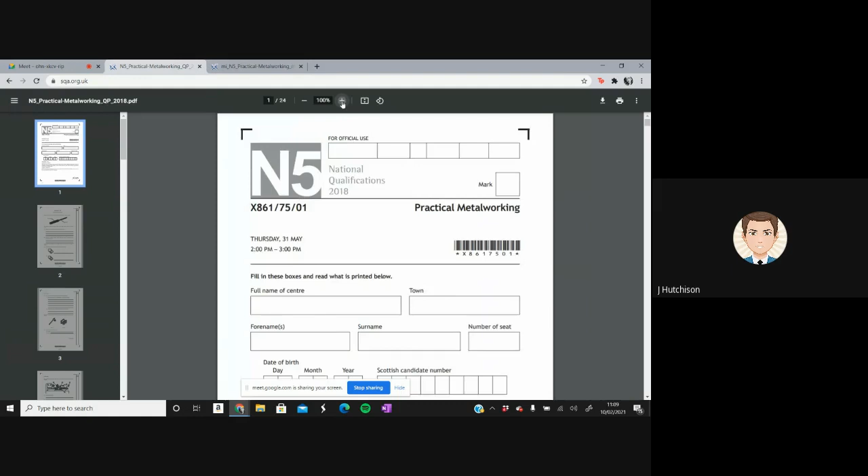So today what we're going to do is we're going to take a wee look through the 2018 National 5 Practical Metalworking paper as well as the marking instructions. So, there we go, close that. Hopefully we can see we've got the past paper on the screen as well as the marking instructions right there. So, as we can see, it's a 1 hour long paper and it is worth 60 marks.

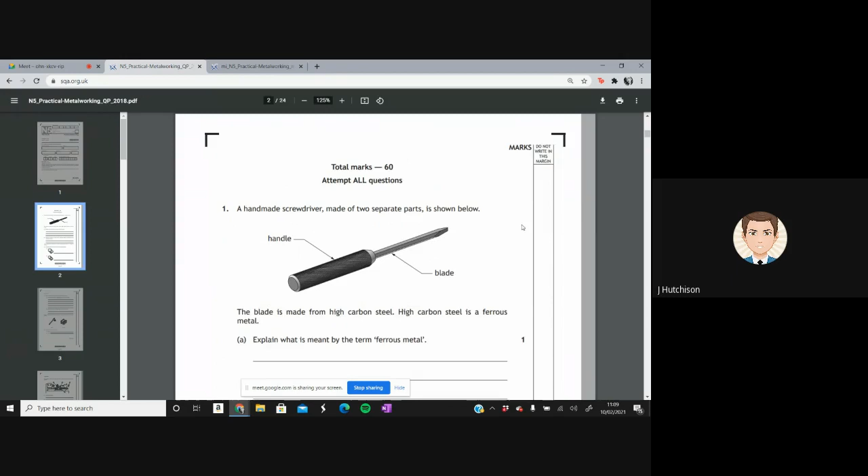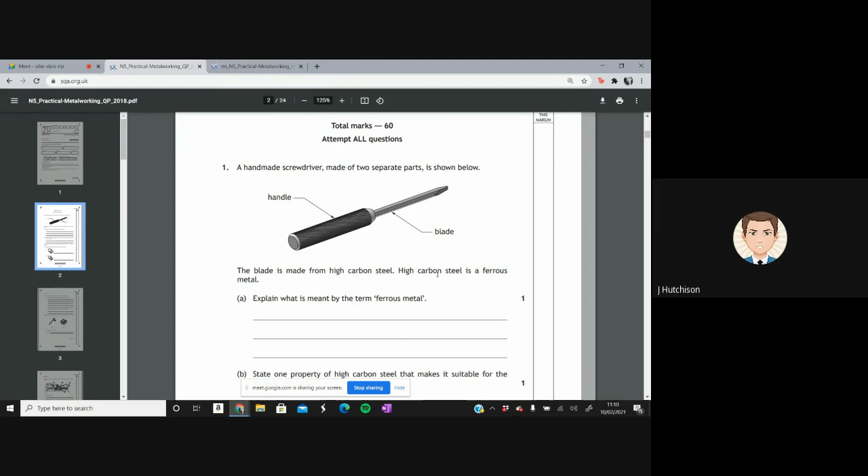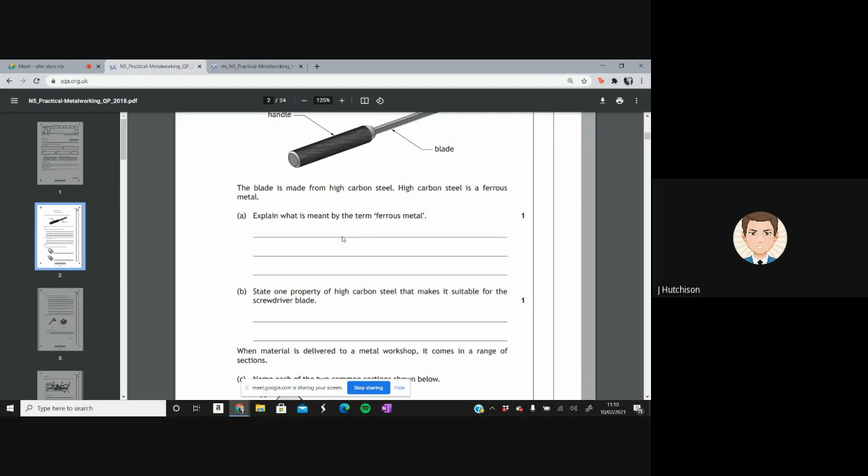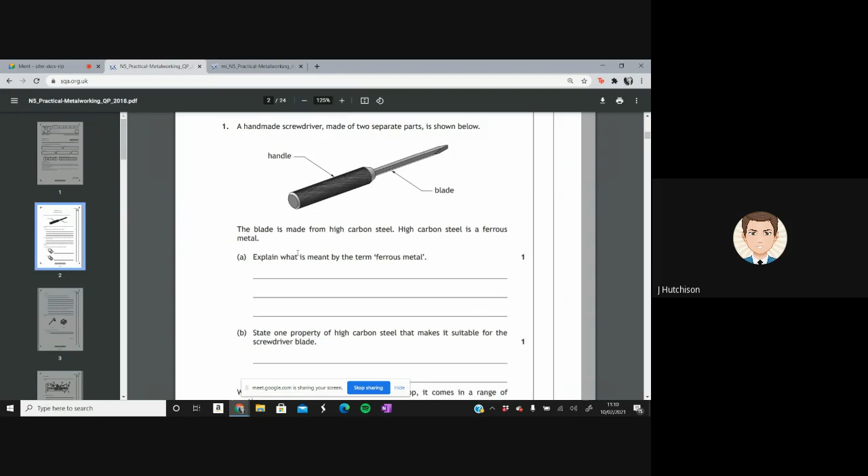So, going into question 1 here, a handmade screwdriver made of 2 separate parts is shown below. So we've got the handle and we have the blade. The blade is made from high carbon steel. High carbon steel is a ferrous metal. Explain what is meant by the term ferrous metal. So this is only worth 1 mark here, and the answer that they should be looking for is that ferrous metals contain iron. So if we look at the marking instructions 1A, ferrous metals contain iron, 1 mark. All good.

Another 1 mark question here, state one property of high carbon steel that makes it suitable for the screwdriver blade. So all of our different types of material, I would be learning at least 1 property, definitely a couple more, but at least know 1 property of every type of material. So for high carbon steel, things that come to my mind is that it's tough, it's hard, it's also strong.

So if we have a look, accept any one of the following. So we've got tough, hard wearing, durable, impact resistant, hard, can be hardened, can be tempered, strong, and any property that relates directly to screwdriver use. Do not accept brittle and do not accept inferior resistance to corrosion. So these are the answers that we will not accept, and you've got a large list of answers we do accept just for 1 mark.

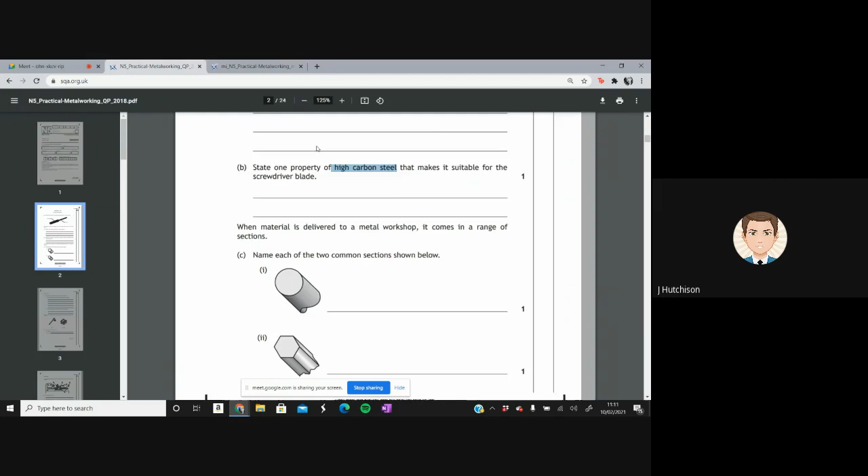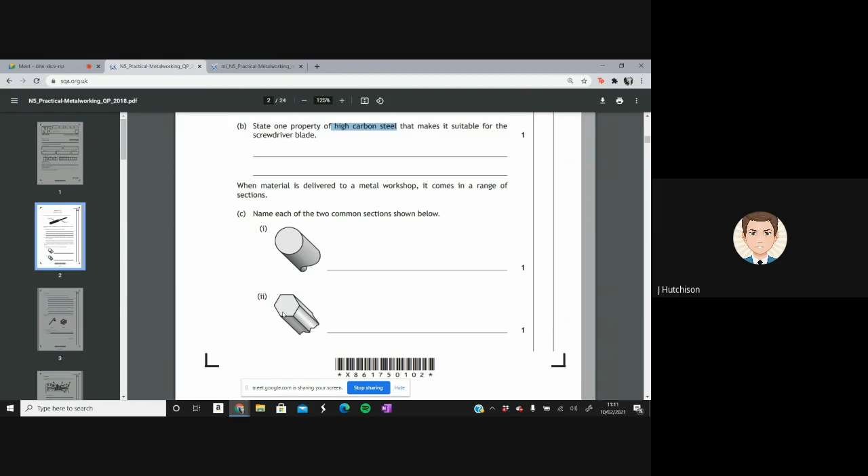Question 1C, name each of the 2 common sections shown below. Now, this is a nice easy question, 1 mark for each. All it's asking is what shape is this bar? So for I, what I would say is it's a round bar, it's just a cylinder. And for II I would put hexagonal bar because we've got a hexagon on the front there. So there, round bar and hexagon bar. For hexagon bar, it would accept any reference to hexagonal bar, for example, a hex bar or a hexagon bar.

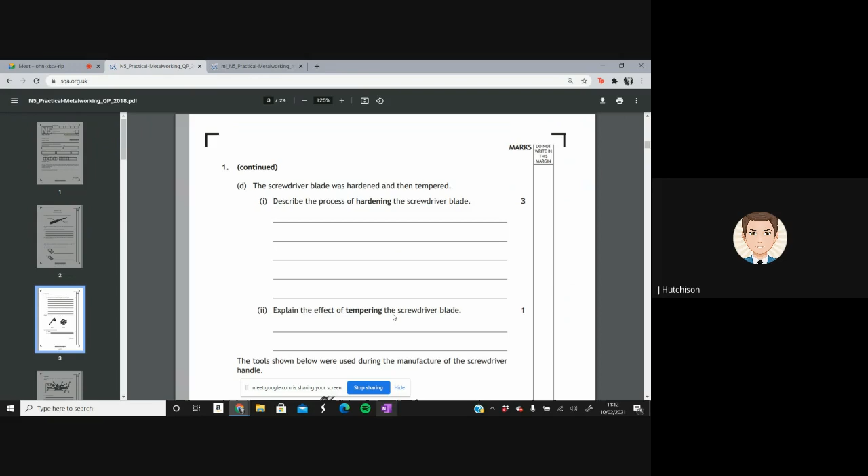Moving on to 1D, onto the second page now. The screwdriver blade was hardened and then tempered. Describe the process of hardening the screwdriver blade. So this is a 3 mark question here. To harden, you need to heat the metal up first. You need to heat the metal to a cherry red color, and then you need to cool the metal rapidly.

So let's go on. Heat the screwdriver blade is worth 1 mark. And then stating how hot you need to get it. So a hot cherry red color is what color your metal should be, and that's 1 mark. And then cooling rapidly is also 1 mark. Candidates may specify cool in water or oil, quench in water or oil. This is acceptable. As you're putting a hot piece of bar into either water or oil, it's called quenching the bar. But at the same time, quenching it is also cooling the bar. So they would accept either.

Moving on to II now, we've got explain the effects of tempering the screwdriver. So what tempering does is that it reduces brittleness and it also reduces hardness, but all they're asking for is 1 mark out of that. So either one of those 2.

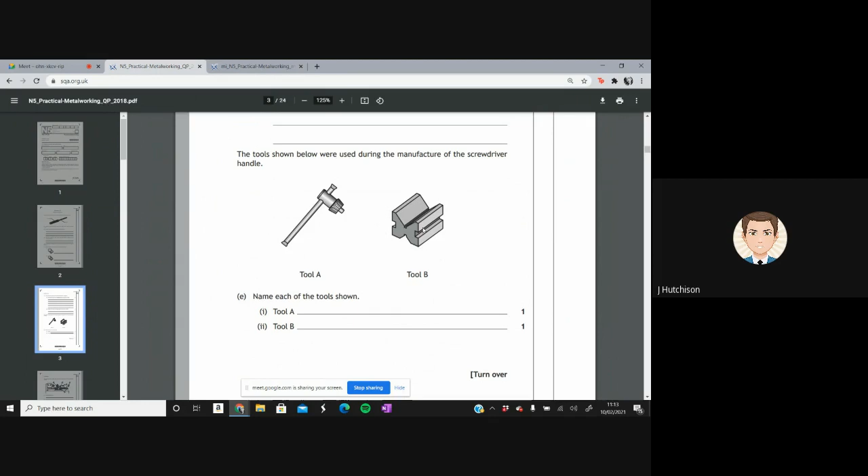The tools shown below were used during the manufacture of the screwdriver handle. So we have got tool A here and we've got tool B here. What we have for tool A is a Jacob's chuck key, and for tool B we have a V block right there. So if we go in here, yep, I is a Jacob's chuck key and II is a V block. 1 mark for each. For I, they would also just accept chuck key. So you don't need to include Jacob's, but that is what it is. It's a Jacob's chuck key, but we just say chuck key for short.

Moving on to F here. The machine shown below was used in the manufacture of the screwdriver handle. So F, name this machine. Nice and easy. This is the center lathe. We should have all had a wee shot of it.

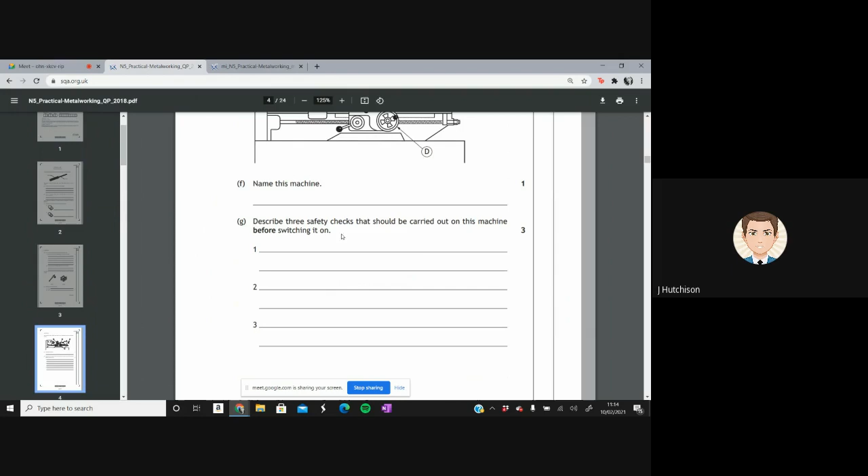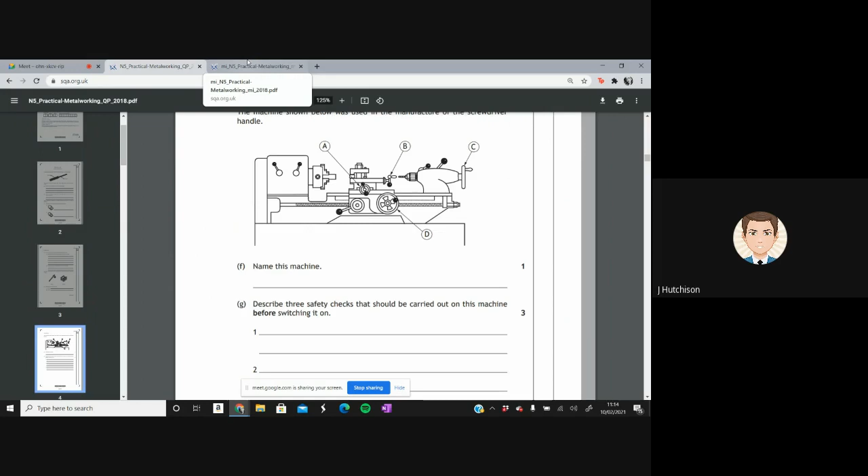Describe 3 safety checks that should be carried out on this machine before switching it on. So if you remember, most of the machines use generally the same health and safety rules or safety checks. The lathe has a couple specific ones just for it. I guess we would need to make sure that the guard is down. That's specific for the lathe. Obviously, there are guards on pillar drills, but you don't need to use them all the time.

So if we go in here and we have a wee look, we'll need to skip onto this page now. What they want is any 3 of the following answers. So obviously the guard must be placed in position. The difference for the center lathe is it must be positioned at all times. They have this in brackets though, so as long as you put the guard must be placed in position, that's fine. The material to be machined must be placed in the chuck securely. So that's securing your material.

Chuck key must not be left in the chuck. Obviously, you wouldn't want that to happen. You wouldn't want a chuck key pinging halfway across the classroom. Check emergency stop, foot or knee switches, and make sure they're working. So always try, turn on the machine, make sure your emergency stops are working. Ensure feed mechanisms are not engaged before starting the tool. So obviously make sure everything's turned off. Make sure the tool's at the correct angle.

Machine should be set at the correct speed, so obviously we can change the different gears to make it move at different speeds. Cutting tool is secure in the post, so we've got our material as well as our cutting tool secure. Drill bit obviously secure as well, and any reference to checking parts of the machine for damage or missing parts. So always do a quick check over on your machine to make sure everything's in working order before you turn it on.

Cool. Moving on to 1H now. So we have handles A, B, C, and D shown on the machine opposite, used during the manufacture of the screwdriver. Identify the correct handle to use when carrying out the process shown below. So we've got our different tools right here, and we want our different handles. Now, the handles it's referring to are back on this page right here. So we have A pointing to this handle here, B pointing to this handle, C to this one, and then D to this handle right here.

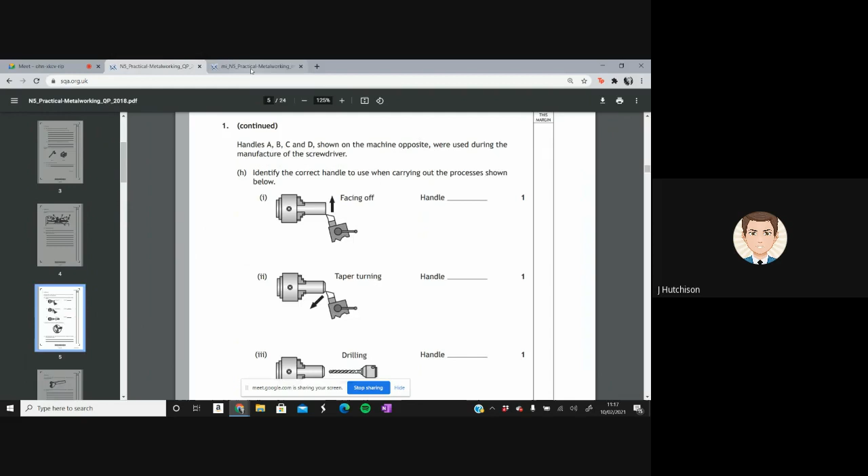So for facing off, we would use handle A. So handle A, this handle here, uses the compound slide, and we can use that for taper turning as well as facing off. So if we go in here, for I, we have handle A. For II, we have handle B. And for the next one, we have handle C. So handle A would be used to face off, handle B would be used for taper turning, and handle C would be used for drilling.

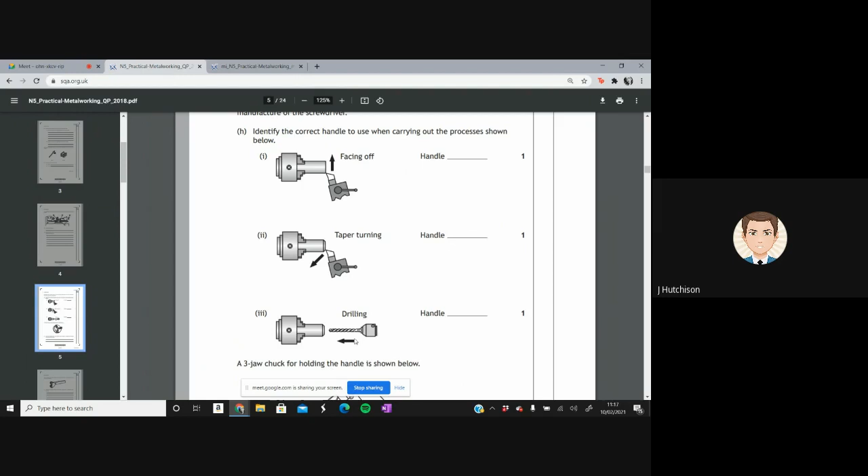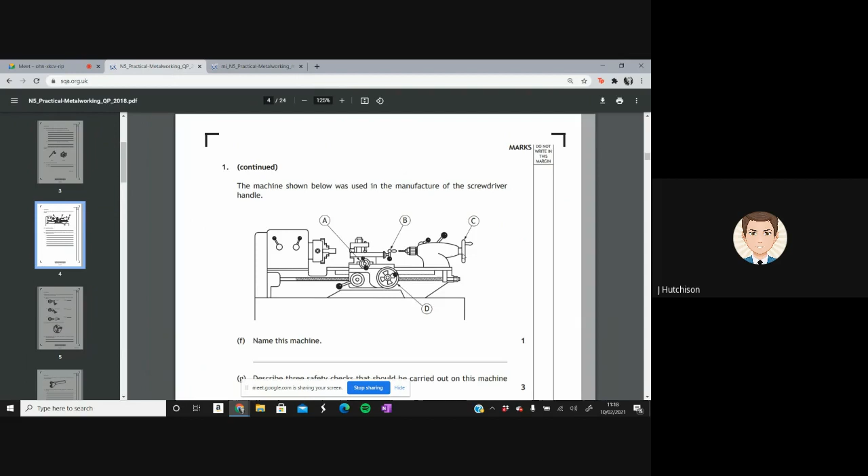So handle A right there, that would be used for facing off. This one up here, I'm pretty sure I said handle A was the compound slide. That's my bad. That's that one there, handle B. And handle C right here at the end of the tailstock would move this drill in for drilling.

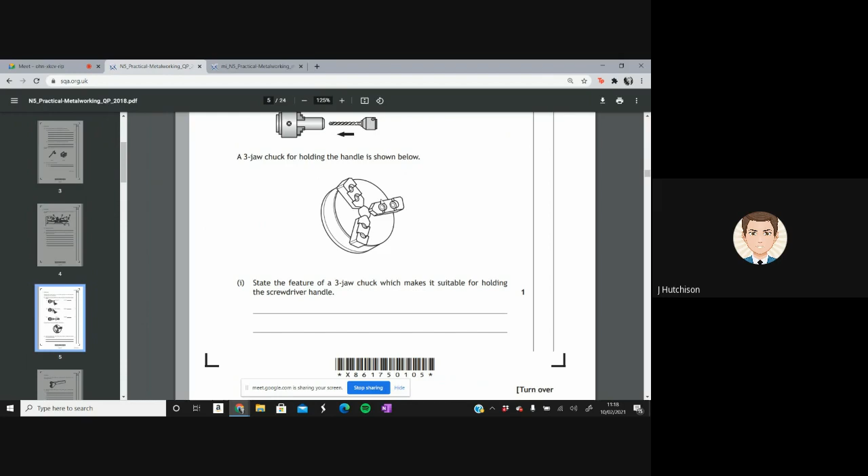Now, a 3-jaw chuck for holding the handle is shown below. So state the feature of a 3-jaw chuck which makes it suitable for holding the screwdriver handle. The thing they're wanting you to reference is that all of the chuck's jaws, these 3 jaws, move at the same time, and they can perfectly hold a cylinder for turning. So if we have a wee look at the answer, all 3 jaws move at the same time, and another one you could have is that the 3-jaw chuck is self-centering, so it will make sure that your material is nice and centered.

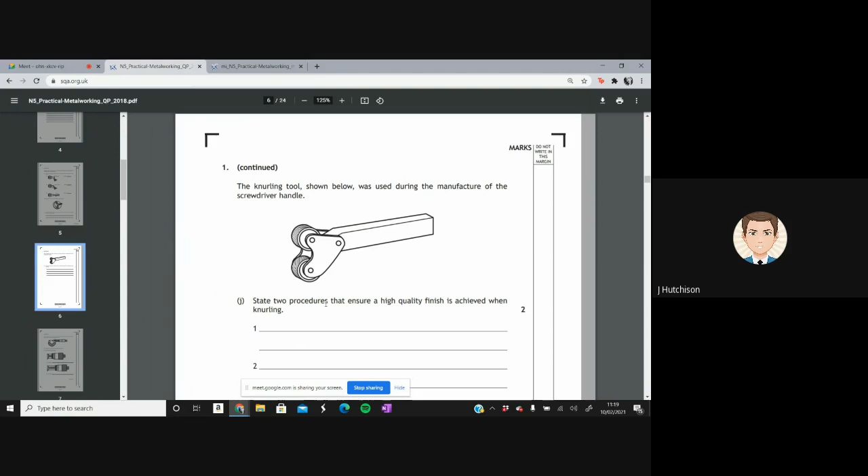1J, I think this is the last one out of question 1. The knurling tool shown below was used during the manufacture of the screwdriver, so that's going to be for the nice textured handle. State 2 procedures that ensure a high quality finish is achieved when knurling. So one thing I always like to remember when we're knurling, we always need to change the speed of the machine. We need to make it a bit slower. So for my first answer, I always put change the speed of the machine, because if you keep the speed up high, it's not going to leave a good quality finish with the knurling tool. So we always want it nice and slow. So that can always be 1 mark.

Another couple answers that we can have for this, because keep in mind it's a 2 mark question. So set the center lathe to a slow turning speed. That's our first mark. Always remember that. We could use coolant on the knurling tool. We could adjust the pressure of the knurling tool, so how hard we're pushing it into our work, how deep the cuts are going to be. Tool must be at the right angle to the workpiece. So obviously we want to make sure that it's sitting nice and flat against the workpiece.

Always clean the knurling tool after use. Always check if your tool is sharp enough before you're about to use it. And we could also set a pivot pin of knurling tool to the center height.

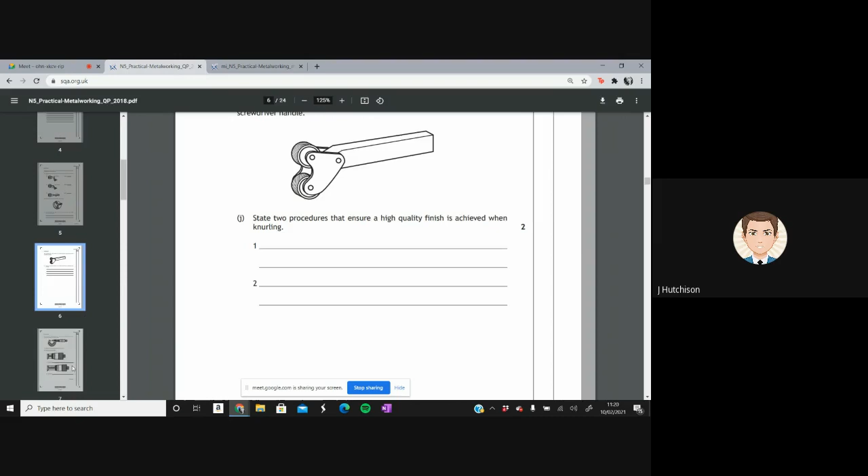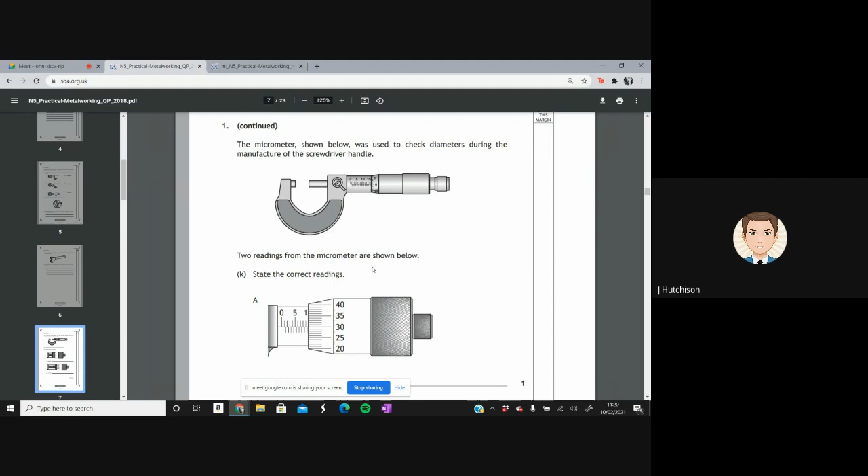Now, moving on, we have a micrometer question. Oh, we're still on question 1. The micrometer shown below was used to check diameters during the manufacture of the screwdriver handle. 2 readings from the micrometer are shown below. State the correct readings. So all we've got here is we've got 2 readings of our micrometers, and we want to try and find out what they are.

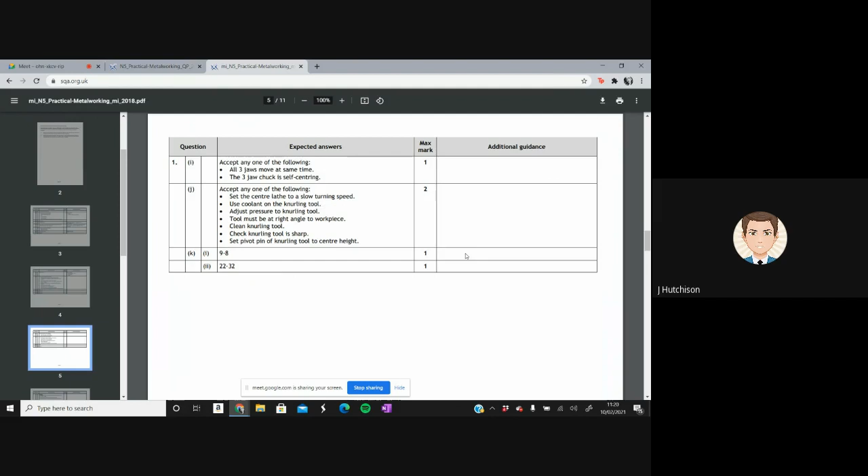So the answers for those ones, 9.8 and 22.32. Now, as you can see, additional guidance, there isn't any, so they want you to get these exact answers. Usually there would be a bit of a tolerance, but right here, since it's just a nice clear picture of the micrometer, they want you to give the exact measurement. So we have 9.8 for I, and we have 22.32 for II.

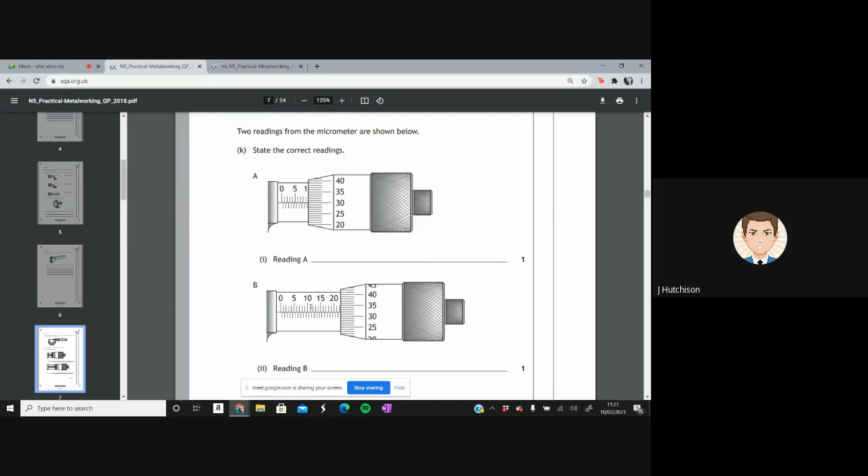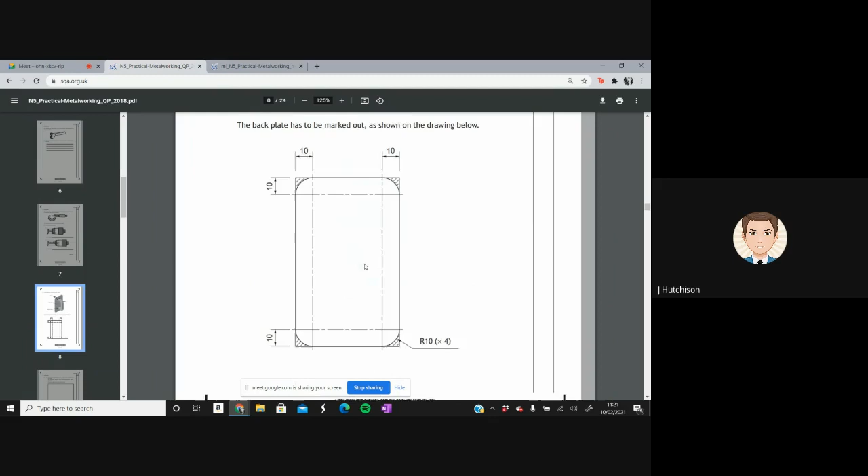A(i), describe how to accurately mark the radius 10 on the corners of the backplate. You must make reference to all tools, processes, and relevant dimensions. You may use sketches to support your answer. Now, like I always say, you may use sketches to support your answer. Just use a sketch. This isn't art. This isn't graphics. We're not requiring you to be good at drawing at all.

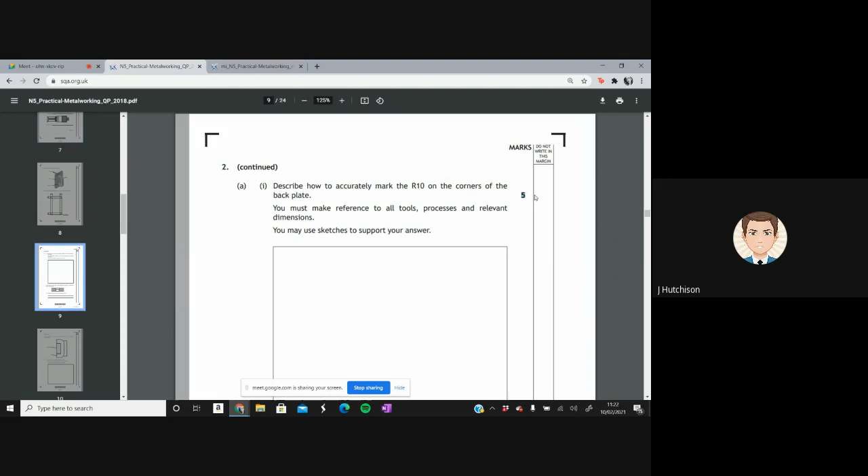All that sketching does is it helps the marker see what you mean, because you could be describing all of this with words and it might not make any sense. But if you draw a small sketch and then draw an arrow pointing to that sketch, it could help the marker piece it together. So 5 marks for this question. Now there's a couple different approaches. This is the type of question that you might get multiple different answers to. So we'll go and take a look at a couple of the answers. See 5 marks, and we've got 2 methods right here.

So first method, you would get a mark for setting odd leg calipers. You would then get a mark for marking center lines, 10 millimeters from each edge. Then center punch where the lines intersect. Obviously you want to do this at each corner, so they've put ×4. Remember, we don't need to write out full paragraphs. We can just write these out in bullet points. It's just wanting a step-by-step on how you would mark out the shape. So that's 1 mark there.

And then set spring dividers, another mark, and to 10 millimeters and mark radii. So usually I would probably have this as 1 sentence, but that's just me. I would say set the spring dividers to 10 millimeters and mark the radius. But you can see if you say set the spring dividers, that's worth 1 mark, and to 10 millimeters and mark the radius is also another mark there. So I would probably only have about 4 points for that, but I would still be getting the full marks for setting the spring dividers and to 10 millimeters.

Method 2, we want to use a steel rule and measure 10 millimeters from each edge. Use an engineer square to scribe and mark the lines. Again, center punch our 4 corners. Make sure to say either ×4 or your 4 corners. Set the spring dividers, and again, that's our last mark there. Set the spring dividers, 1 mark, to 10mm, and mark the radii as 1 mark as well.

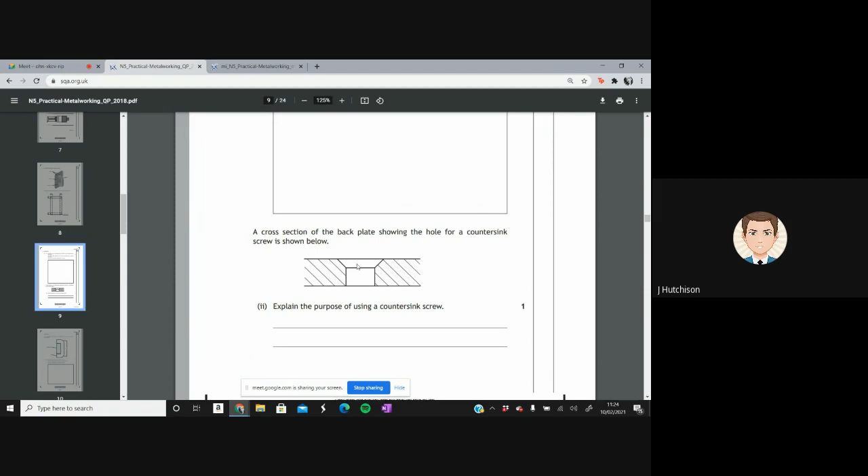So the main point is, so the screw sits nice and flat and level with the surface of the material, so the screw doesn't stick up a wee bit. So if we look here, to allow the head of the countersunk screw to sit flush with or below the surface of the backplate / material. So that's 1 mark there.

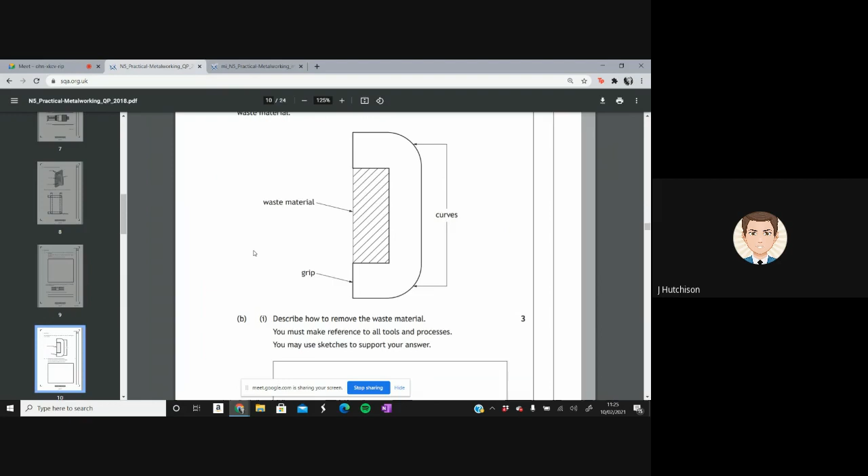Moving on. So we've had a marking out question. Now it seems as if we're coming to a cutting out question. So this drawing shows how the grip was marked out prior to removing the waste material. So that's the grip, that's the handle, and we've got our waste material right there. Describe how to remove the waste material. You must make reference to all tools and processes. You may use sketches to support your answer.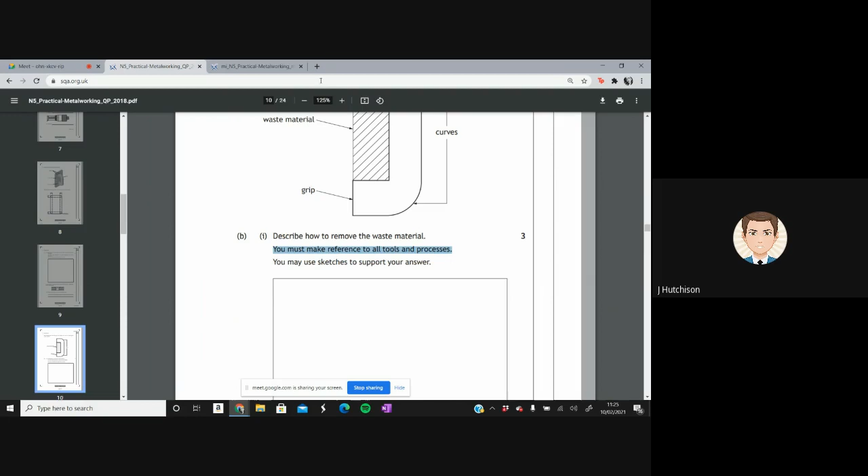So obviously one thing I forgot to highlight on the last one, you must make reference to all tools and processes. If you just say you're doing things and you don't explain what you're using for them, you don't get any marks for that. So always make sure you use the right names and the right tools. So going on here, again, we'll have 2 different methods. Only a 3 mark question this time.

Any reference to drilling holes to accommodate blades, using the hacksaw, junior hacksaw, to cut or remove waste material, or filing lines to the correct size. We could also use a chain drilling method. So chain drill along waste material, remove waste material with a cold chisel or a combination of hacksaw and cold chisel, and then lastly, again, file to the lines. So obviously, once we cut everything out, we want to file it and make sure it's all nice and even.

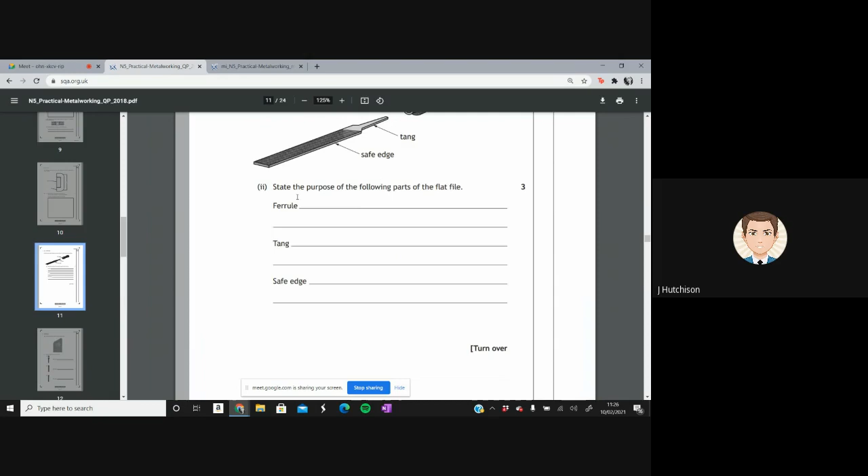Looking here, a flat file was used to shape the curves. Parts of the flat file are shown below. So it's given us the name of the ferrule, the tang, as well as the safe edge. So we're not wanting to name these. Instead what we're wanting to do is we're wanting to state the purpose of each of these parts.

So we have the ferrule. Prevents the handle of the wood splitting. So the ferrule wraps around this wooden handle right there. That's a piece of metal. Tang goes inside, and this ferrule will stop this wood from splitting. It holds it in place so that the handle can sit nice in there.

Then we have the tang. The tang is to locate and attach the file handle. So that's this stretch of material right here, and that's what sits inside the wooden handle. So this will run along the wooden handle so that a fair bit of material is actually connected inside that handle there. And lastly, we have the safe edge.

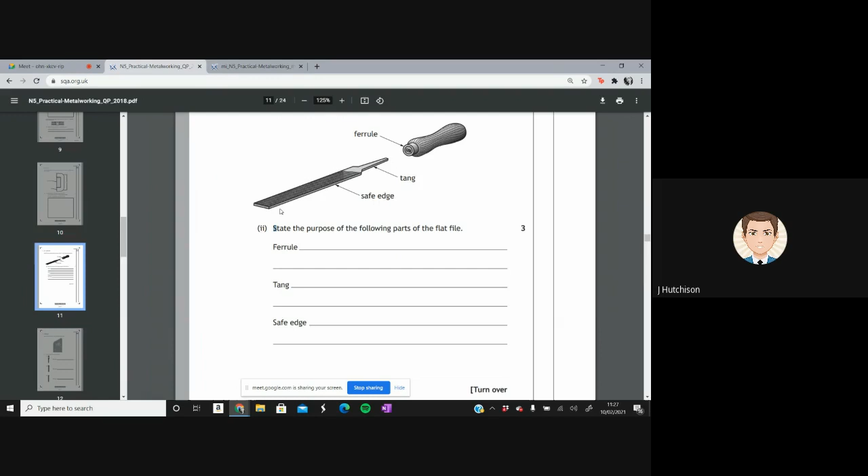That's just to make sure that no cutting is going on in that edge, so you don't go over. So prevent material from being cut during filing operations and protects thumbs, fingers during filing operations. So it's like a safety edge, and also so that you don't cut material you don't want to. So explaining each of those gives you 1 mark each.

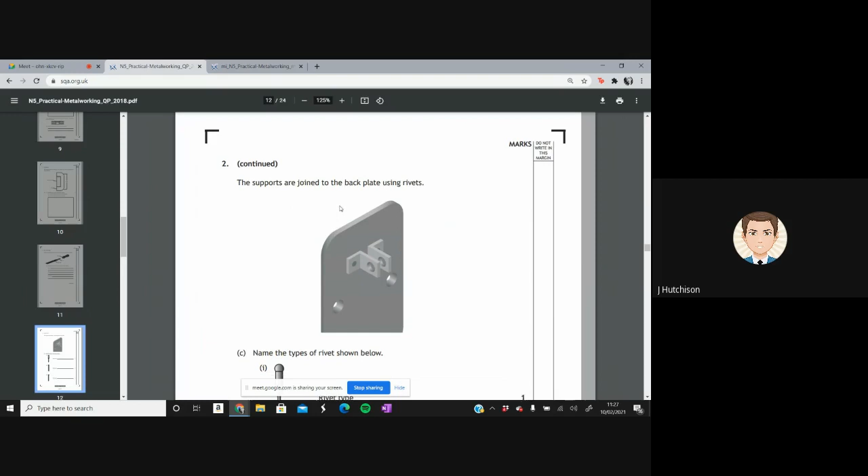On to 2C. So this is just naming the types of rivets we have right here. So what we've got right there, we have a pop rivet. You can remember that for the ball on the top. We have a snap head rivet, and we also have a countersink rivet. Remember the countersink because it's got this angled slope here. So let's go in, let's double check that we're right. Pop rivet, snap head rivet, countersink rivet. Perfect.

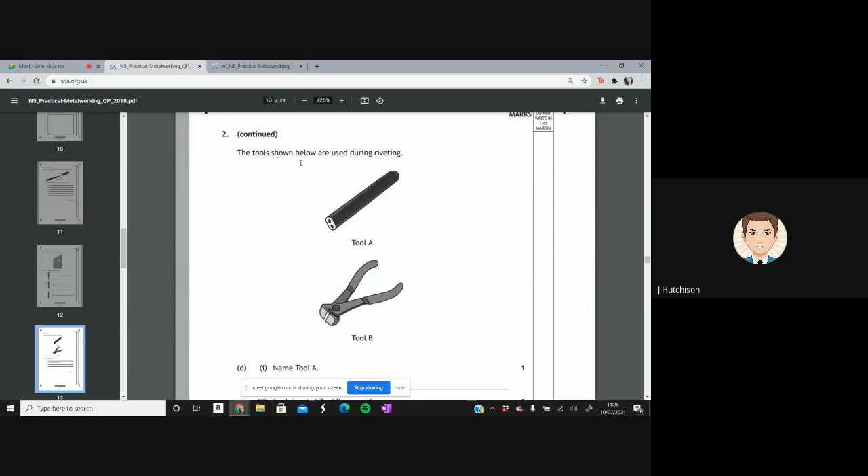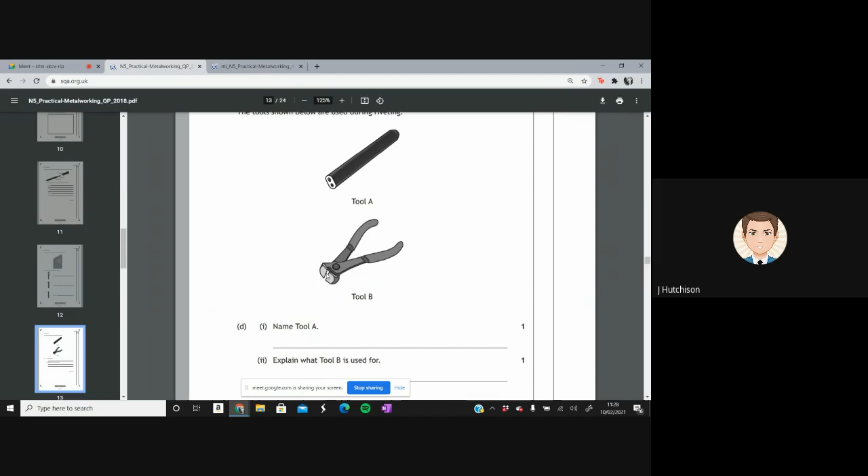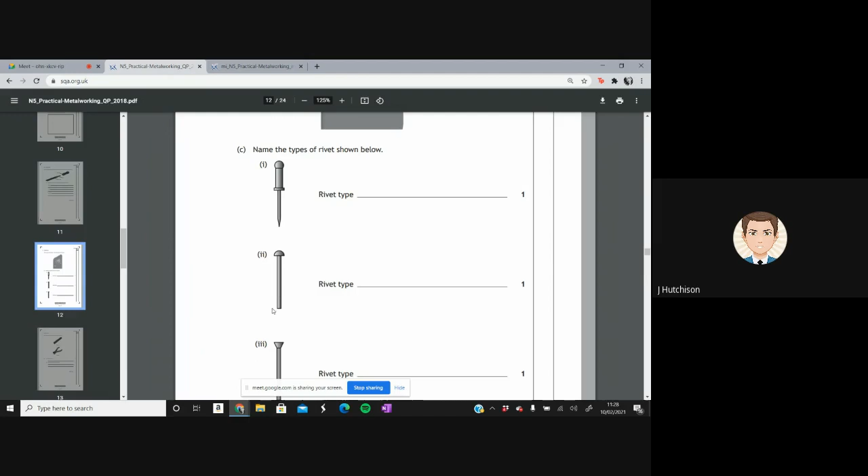Question 2D, the tools shown below are used during riveting. So we have tool A and we have tool B. So tool A would be a rivet snap set. We'll go in and check. Rivet snap set, perfect. 1 mark for that. And it's not asking us the name for tool B, it's asking us to explain what tool B is used for. And these are small pincers to cut rivets to the right length. So to trim the end of rivets to the required length. So if we have a rivet, it's a wee bit too long, just trim it off.

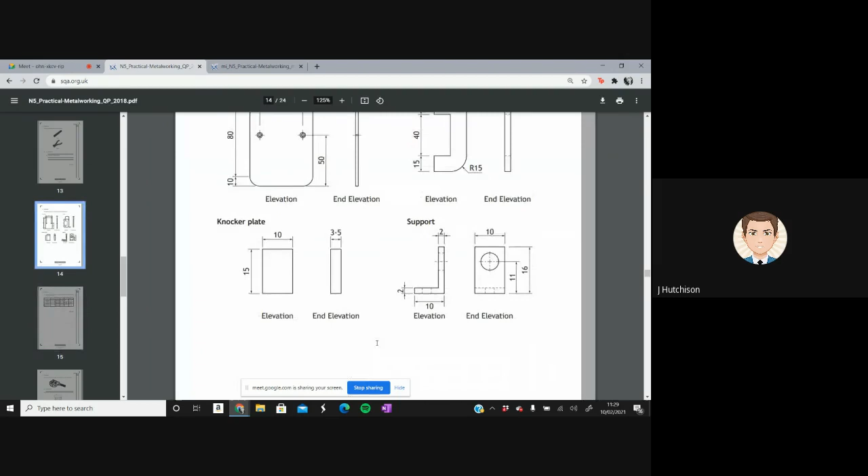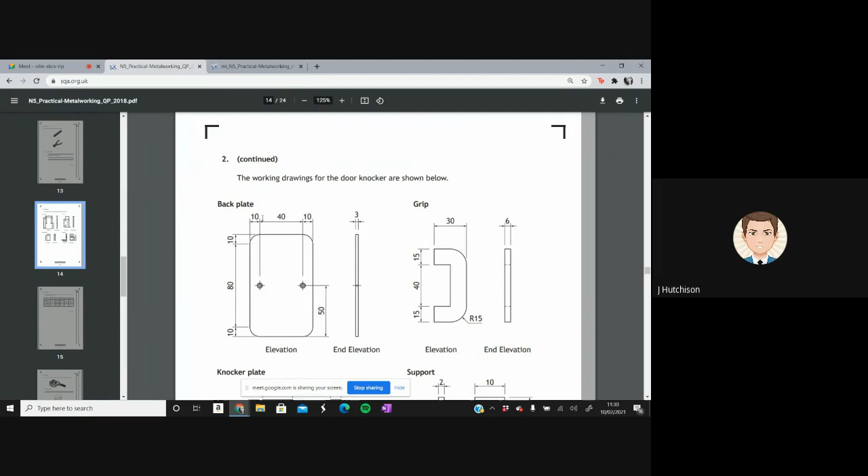So if we go up here, what we want to do is we want to have a look at backplate right there. And what we're trying to find out, we know the length is 100 and the thickness is 3. So there's 10 plus 80, that's 90, plus 10 is 100, so that's the length. The thickness of the material over here is 3. And what we want to find out is the width. So this area here, and what I can see is I've got 10 millimeters, plus 40 is 50, plus 10 is 60. So for this breadth here of the backplate, that would be 60.

For the grip, number 1, mild steel. Length, we don't know. Breadth is 30 and thickness is 6. So come up here to the grip. Width is 30, thickness is 6. We want the length of it, so we'll add 15, add 40, so that's 55, and then 55 plus 15 is 70.

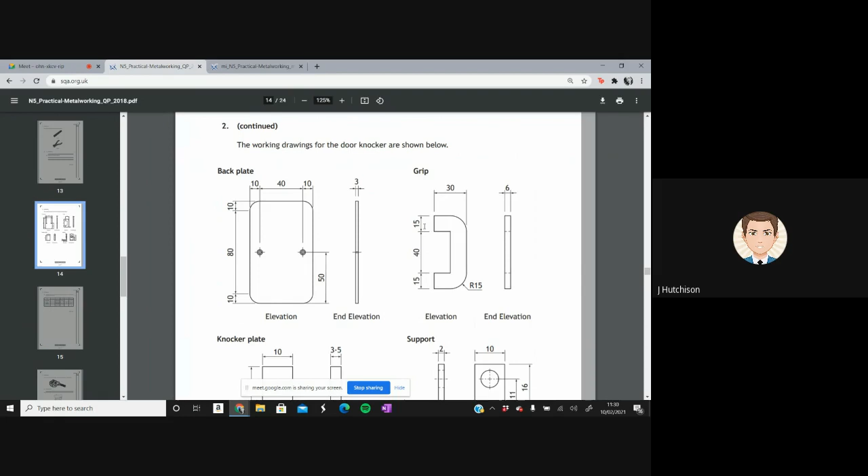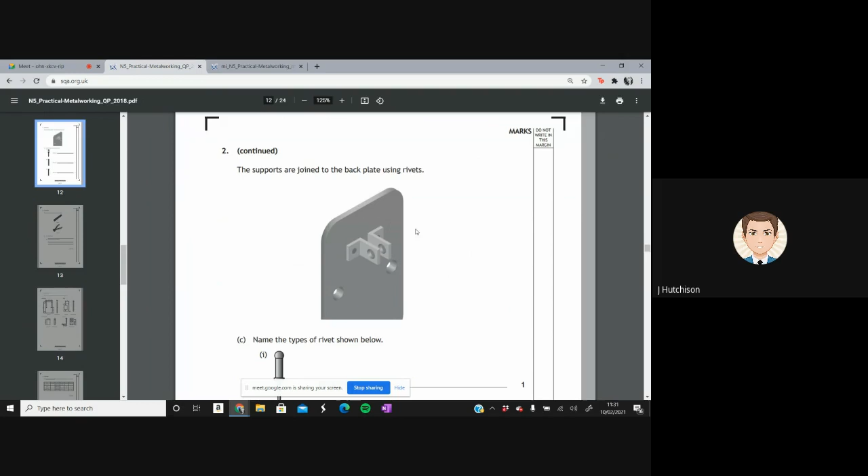Nope, that is some bad maths by me. 55 plus 15 is actually 70. So in that one, we would have a length of 70 for the grip. For the support, we have everything apart from the number it has. So as you can see here, it's only showing us 1 support. But if we go up, I believe it was here to this one, because it's still all the same question. This is still on question 2. You can see we require 2 supports in that image there. So what I would go is I would go down here and I would write 2 supports are needed.

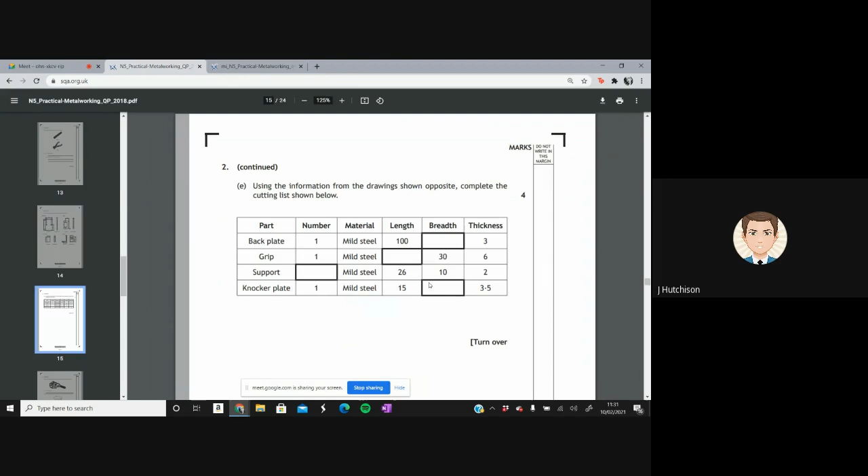For the last one, the knocker plate, number 1, mild steel, length 15, breadth we don't know, and thickness is 3.5. So this is the knocker plate. Length is 15, and width, nice and easy. Already got it there. It's 10. So let's go on and check. Yep. So we've got 60 breadth for the backplate, 70 for the grip, 2 supports, and 10 is the breadth of the knocker plate.

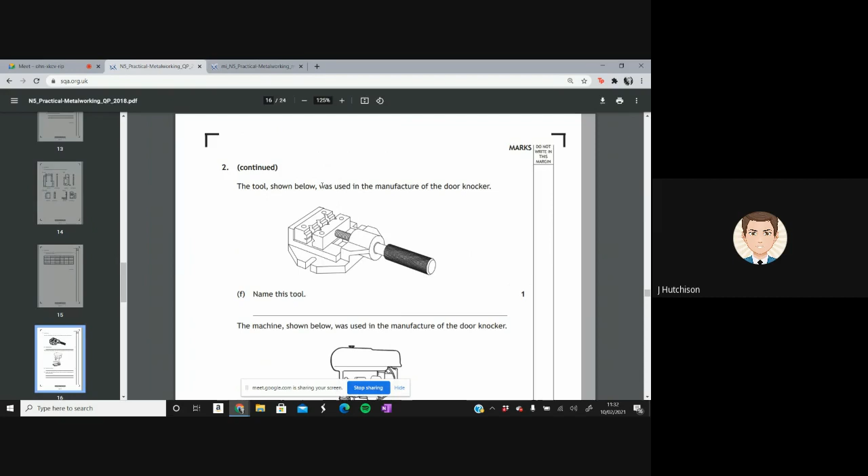Moving on, a couple of name the tools or machines. So the tool shown below was used in the manufacture of the door knocker. Name this tool. Nice and easy, that's a machine vise. And the machine shown below was used in the manufacture of the door knocker. Name this machine. So I believe for this one, they would accept pillar or pedestal. So we'll have a check. Yep, so machine vise was the answer for the last one. And for G, they would accept pedestal or pillar drill. So either one of those 2 for that.

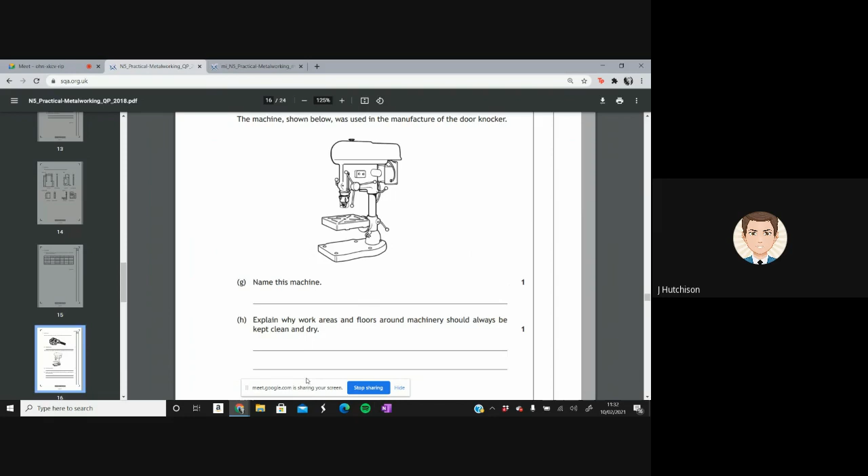Explain why work areas and floors around machinery should always be kept clean and dry. This is nice, easy, health and safety basics. We've got tons of different answers for it. Prevent accidents, injuries, prevent slips and falls, and to access the emergency foot stop. So always make sure that your work area is kept clear.

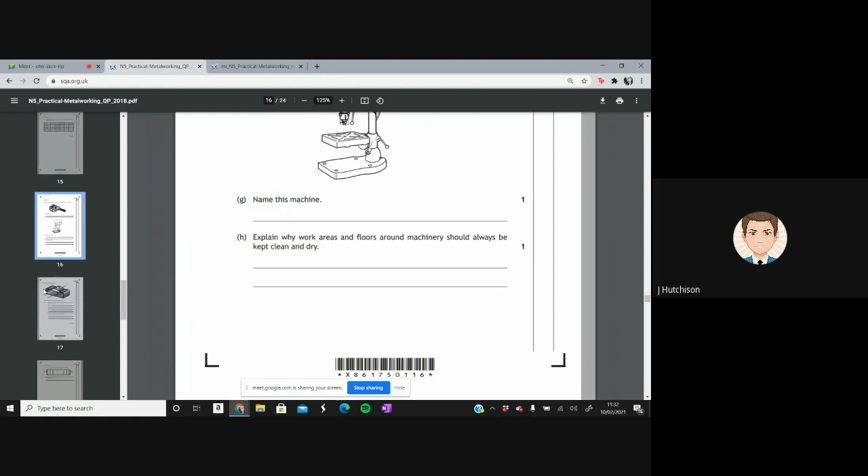Moving on again to question 3 now. So a candle holder is shown below. We have the top of the candle holder and we have the body. The candle holder was made from recycled metal. State why it is important to use recycled metal whenever possible. Give 2 reasons. So the reasons that they're wanting you to mainly look at for this is the recycled metals can be used for upcycling, saves finite resources, stops metal ore running out. Obviously, we have a limited amount of resources. The more recycling we can do, the better.

Less damage to the environment by mining. Obviously, mines take up a large portion of underground work. So the less we do that, the better. And landfill sites are not filled up as quickly, so fewer landfills needed. So less junk lying about. 1 mark for each unique point. So if you were to give 2 points about mining, you would only get 1 mark for that. If the answer is a general comment regarding the environment, only 1 mark can be awarded. So even if you're unsure about this question, if you say it helps the environment, it's a general comment regarding the environment, so you would still get 1 mark, but obviously we want to aim to try and remember these 4 here. They're our main ones. So 2 of those to get the answer.

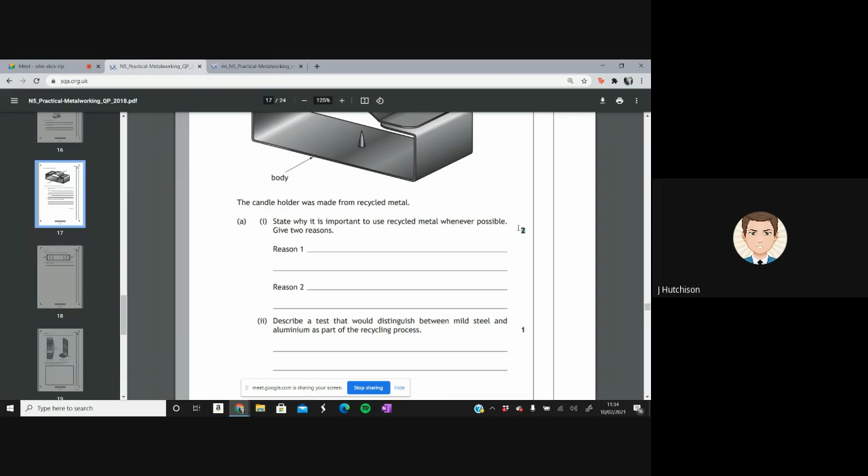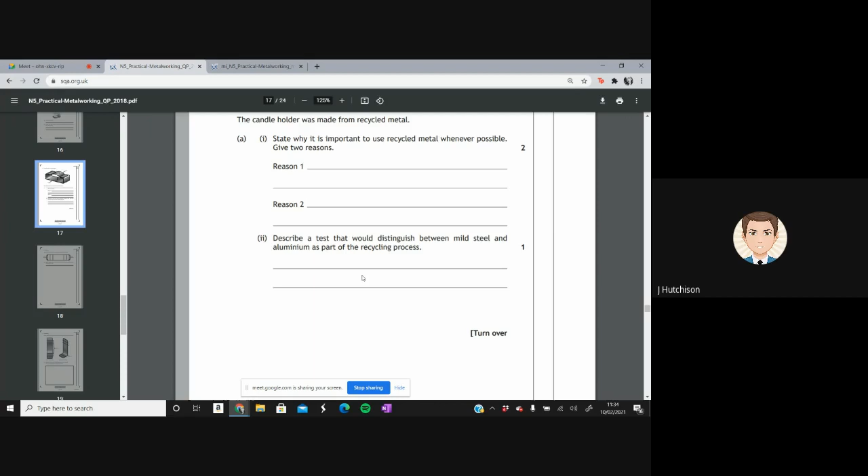Describe the test that would distinguish between mild steel and aluminium as part of the recycling process. So we would want to obviously test which one is magnetic or not. So that's a way that you could tell which one. Obviously, if you wanted to split them all up, just hold a large magnet above it, and one of them will separate from the other. Now, test which metal is magnetic.

Now we're on to question B. The body shown below was made from 1mm mild steel sheet. So we've got our waste material at the corner, and we have our waste material there, and we've got a couple of bend lines. So that's this shape on top here. Name a hand tool that can be used to remove the waste material before finishing with a file. So we have a small bit of material here. We could use a tool before we go to filing. Now, there's a lot of different tools that we could use for this, a couple different answers, and all they want is one of the following. So either tin snips to cut it off, a hacksaw, or a junior hacksaw. So any of the 3 following to cut that bit off, that small waste material.

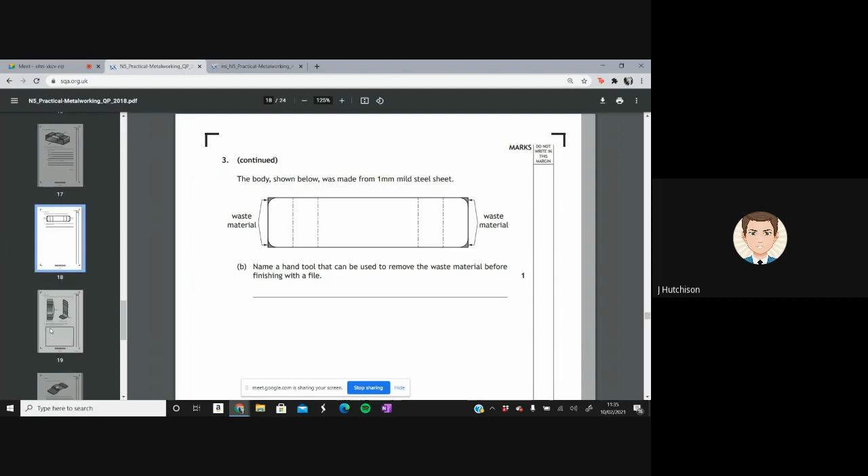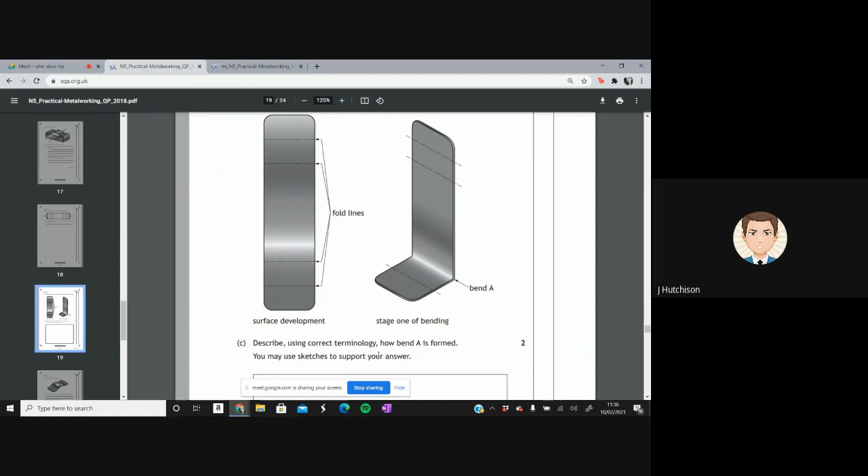Question 3 continued. The surface development and stage of bending the body are shown below. So we have our fold lines, and we're starting to bend this now. Describe using correct terminology how bend A is formed. You may use sketches to support your answer. So another one here, only a 2 mark one this time.

What they're wanting is you're wanting to align the fold lines with an engineer's vise, folding bar, jig, straight edge, box folder. So there's a lot of different methods that we can use to fold metal. So I'm going to go ahead and talk about a box folder for now. So what I would say is align the fold line in the box folder. That would be worth 1 mark. Form bend A with the box folder. And that's our 2 marks there.

Same with if I wanted to use an engineer's vise, I would say align the fold line in the engineer's vise. That's 1 mark. Form bend A with a rubber mallet. So if I had it in the vise, I would be hammering it with a rubber mallet, obviously rubber, to make sure there's no dents in my material. And that's how I would form it that way. So as long as you're saying that you're aligning the lines with whatever method you're using, and then you're forming it using your method, that's worth 2 marks.

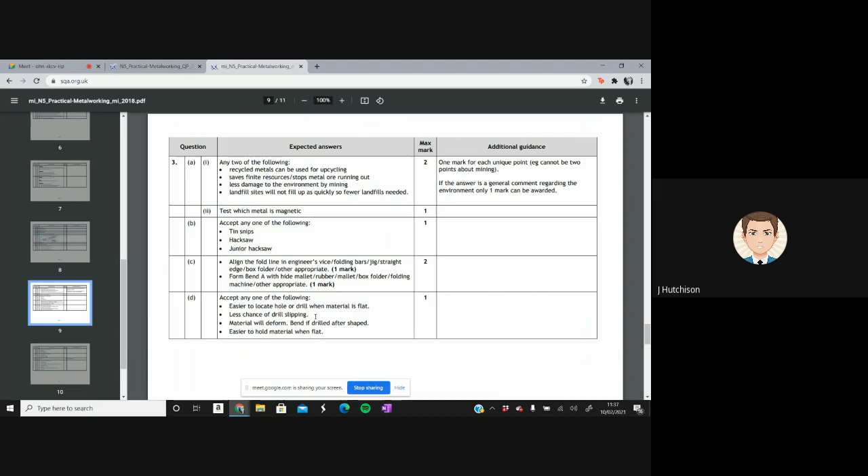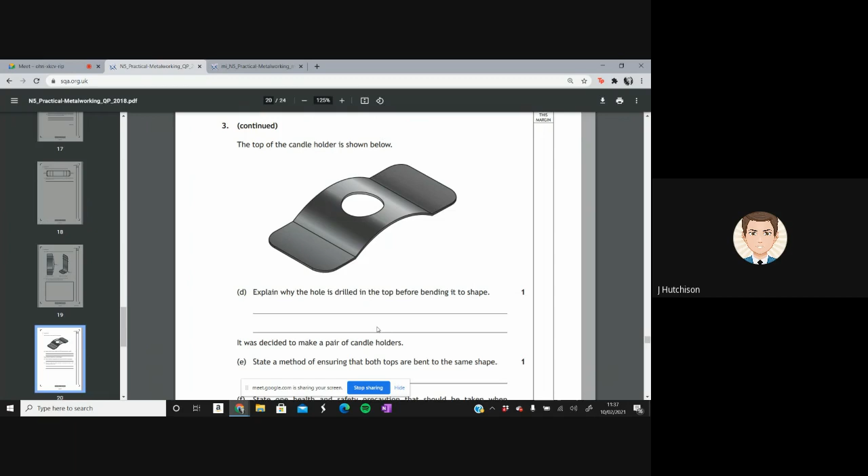On to 3D now. The top of the candle holder is shown below. Explain why the hole is drilled in the top before bending it to shape. So 1 mark for that. Accept any of the following: it's easier to locate the hole or drill when the material is flat. There's less chance of the drill slipping. Material might deform, so if we were drilling down on that and it's already bent, it might end up bending the other way. And it's also easier to hold the material when flat. So common knowledge, why do we prefer to drill on flat surfaces? So 1 mark for that one.

It was decided to make a pair of candle holders. E, state the method of ensuring that both tops are bent to the same shape. So we would accept any of the following: using a jig, using a former, or using a template. So I would usually say if we have a template, we can start to replicate multiple versions of it, working off of the same template.

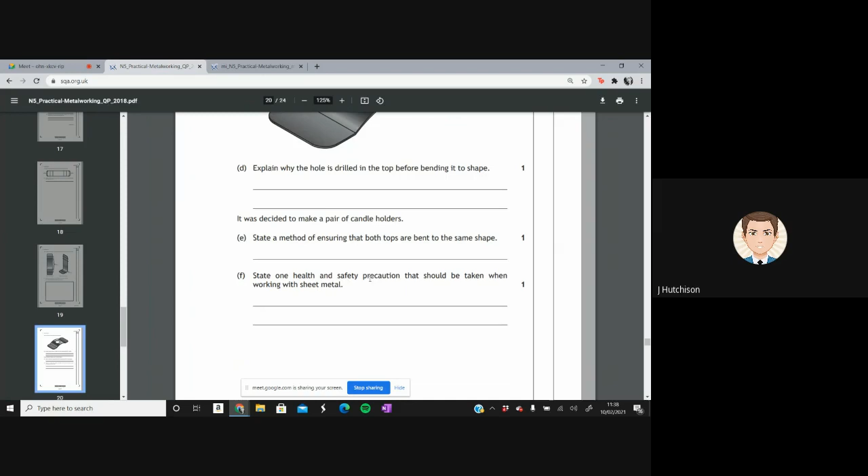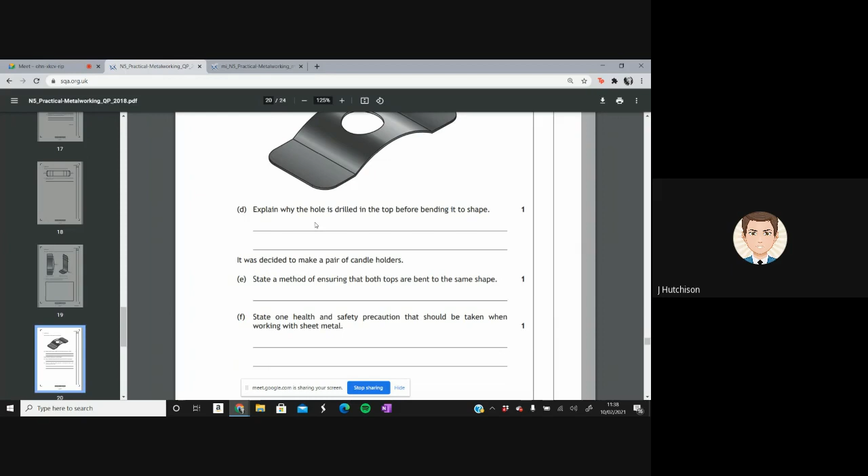1 mark for that. State 1 health and safety precaution that should be taken when working with sheet metal. So when we're working with sheet metal, got to wear goggles, wear gloves, and remove sharp edges. So obviously sheet material is really thin, it'll have a really sharp edge on it, so the quicker we can get that sharp edge away, the safer it will be to work with.

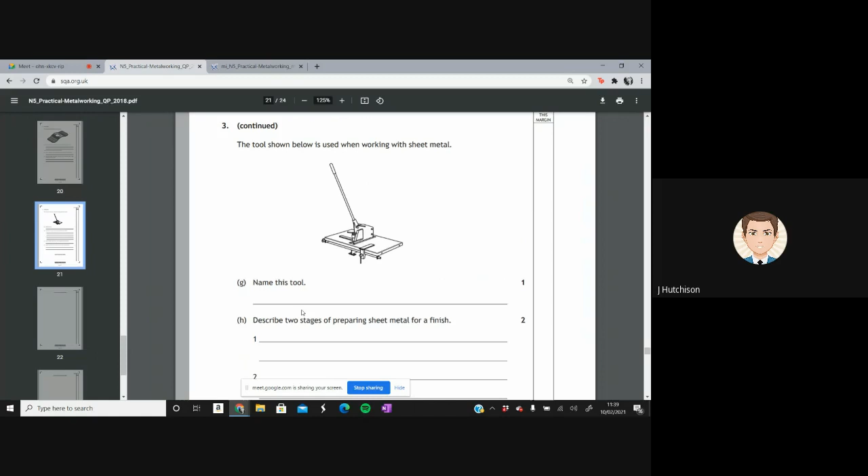On to our last page now. We have question G. This tool is a notcher. So it's a smaller version of the guillotine, and that's why it's called a notcher. Describe 2 stages of preparing sheet metal for a finish. So we've got 2 marks for 2 stages right here. And they would accept any of the following.

So deburr the edges, so clean all the sharp bits of metal away. File the edges nice and smooth. Use an emery cloth, rough, medium, fine grades. You could use wet and dry sandpaper, degrease, prime coat it, or we could use some steel wool as well. So any 2 of these answers. Usually I would go for the nice simple ones. File the edges smooth, and also use your wet and dry sandpaper.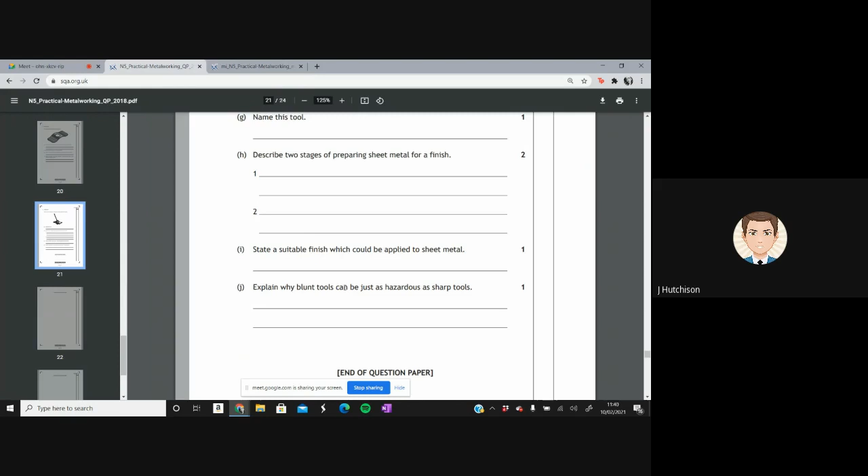Explain why blunt tools can be just as hazardous as sharp tools. So this is our last question here. It's worth 1 mark, and they would accept any of the following. So the tool doesn't function as intended, so it's not functioning properly, which can make it become a little bit dangerous. Extra force is needed.

So say if you are sawing something and the saw blade's not as sharp as it should be, that's you putting more pressure down on the material to give it a better cut, which means you have more chance of the material snapping, maybe the saw blade snapping, anything like that. And obviously, if it's not sharp, it won't cut, so it could slip, which may result in injury as well. So any one of those.

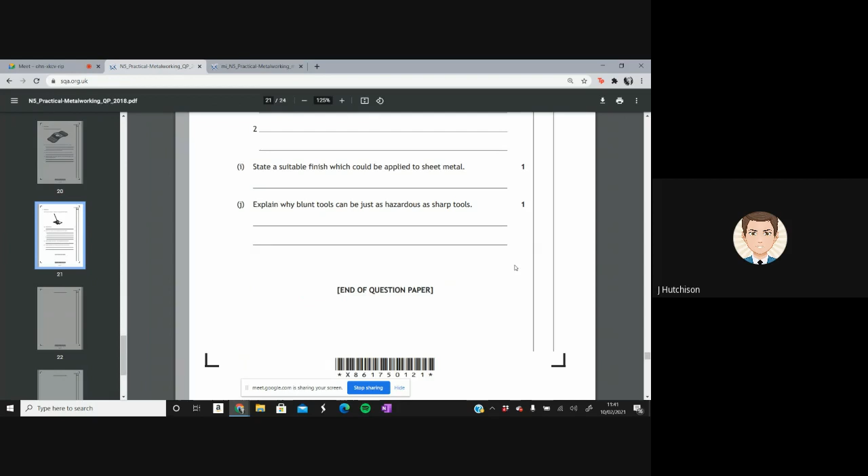So hopefully that was good and informative for you, and hopefully you all know what you need to do to get full marks on the 2018 past paper.